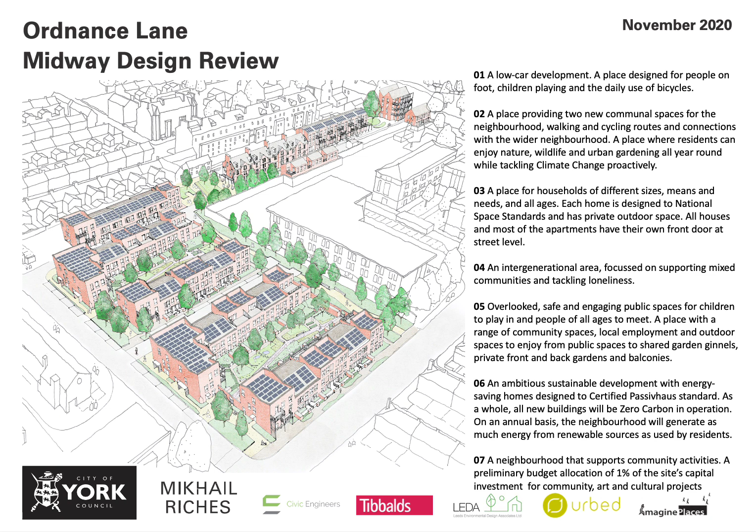The purpose of this presentation is to share our current design progress with you, following on from the workshops held earlier this year. We'd really like to hear your thoughts, so please share your comments in the online survey at the end.

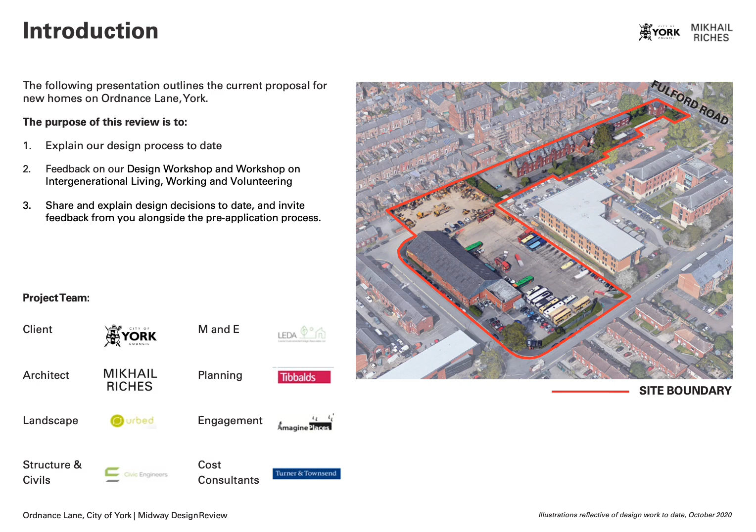This online exhibition follows a number of events held over the last 12 months. We've really enjoyed getting to know local residents and stakeholders at a variety of different workshops and online sessions, and have found your feedback so far extremely useful in shaping our design.

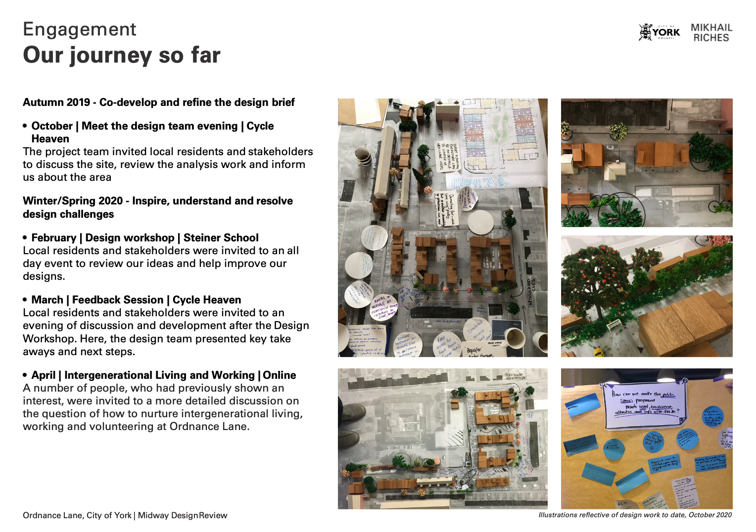At the end of last year, we met residents and stakeholders to discuss the site, review our initial work, and inform us about the area. Earlier this year, we held a day's design workshop, shortly followed by a feedback evening. More recently, a smaller group attended a specific intergenerational online gathering.

In February, we invited you to a full-day workshop held at the local Steiner School. Here, we discussed the scheme in its early stages, and some key development points came out, which the project team have taken away and worked on.

You asked us to review which buildings we were retaining on site. We spent time working through this, but in the end, it just wasn't feasible to retain more of the smaller existing buildings. So we're proposing to retain and refurbish the married quarters. I'll talk a bit more about this later.

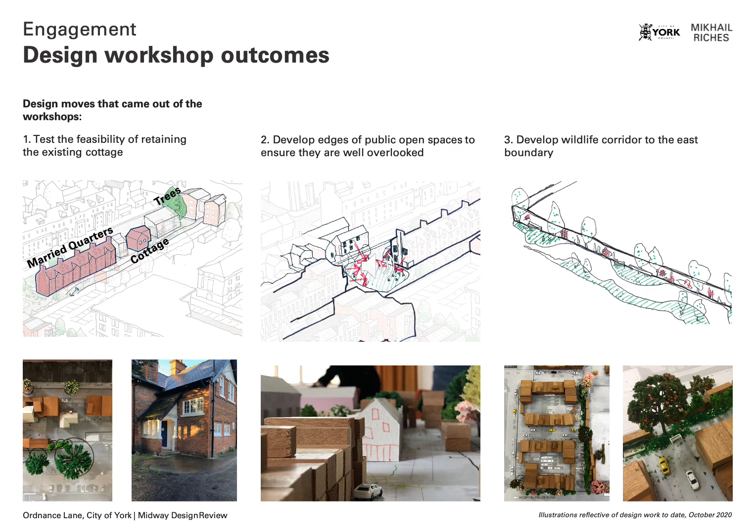You highlighted concerns about overlooking to make our public spaces safe, and together the idea for a wildlife corridor was developed to animate the eastern edge of the site and ensure this space is safe and well used.

Key to the proposal is providing intergenerational living opportunities. This aims to promote mixed communities who support each other, tackling loneliness and isolation.

As part of this online gathering, we explored the difference between intergenerational and multi-generational, and the importance of offering both on site. Intergenerational homes are individual dwellings occupied by mixed communities, so residents all have their own home but benefit from lots of community spaces, shared and private outside space, higher accessibility levels, and a design that's focused on supporting interaction and neighbourly relationships. Multi-generational homes are those that support two or more generations from the same family within one curtilage.

In April, we held an online gathering to focus on the local needs and aspirations for this part of the scheme. The key takeaways from this were to support people of mixed ages, accessibility requirements, interests and situations, to provide external spaces that are attractive and easy to maintain and encourage ownership. These communal spaces should be connected to the wider development and to key routes to encourage interaction.

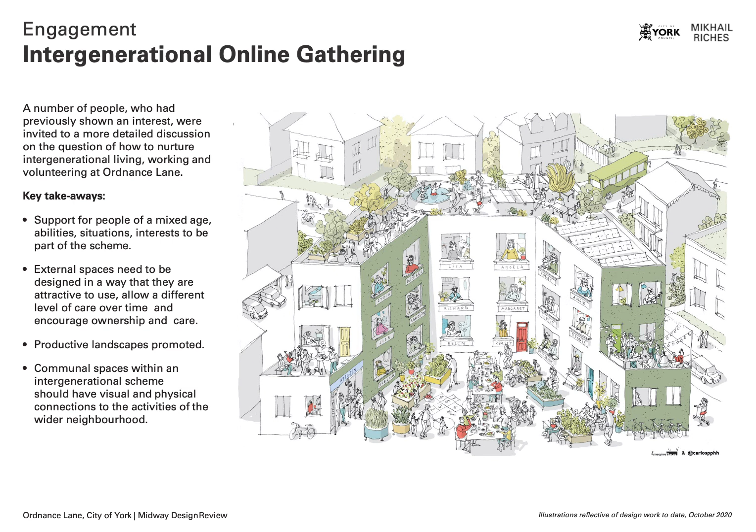I'm now going to briefly run you through our proposal, but first I'd like to bring it back to the core values of the brief, as set out in the CYC's Housing Delivery Programme Design Manual.

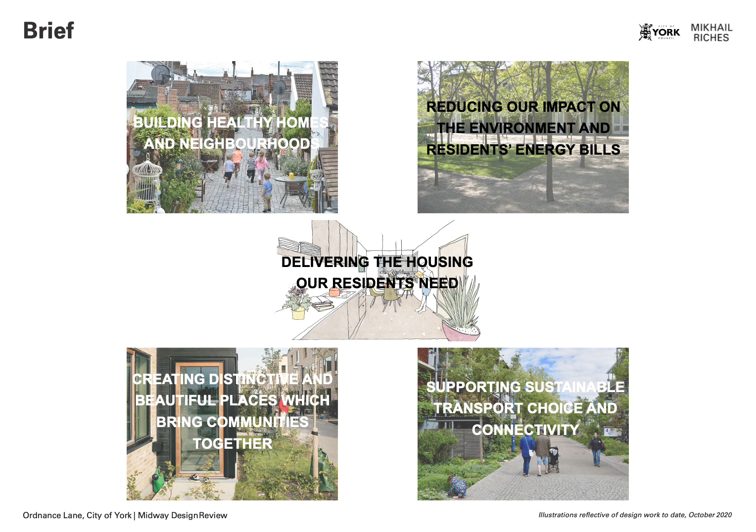These are to build healthy homes and neighbourhoods, reduce our impact on the environment and residents' energy bills, deliver the housing our residents need, creating distinctive and beautiful places which bring communities together, and to support sustainable transport choices and connectivity. The site presents some great opportunities and challenges that have shaped our proposal.

The orientation means that there is great potential for daylight and sunlight from the south, making it ideal for Passivhaus. The proximity to the National Cycle Network and to Fulford Road means that there are many sustainable transport choices available, and great public amenities within walking distance.

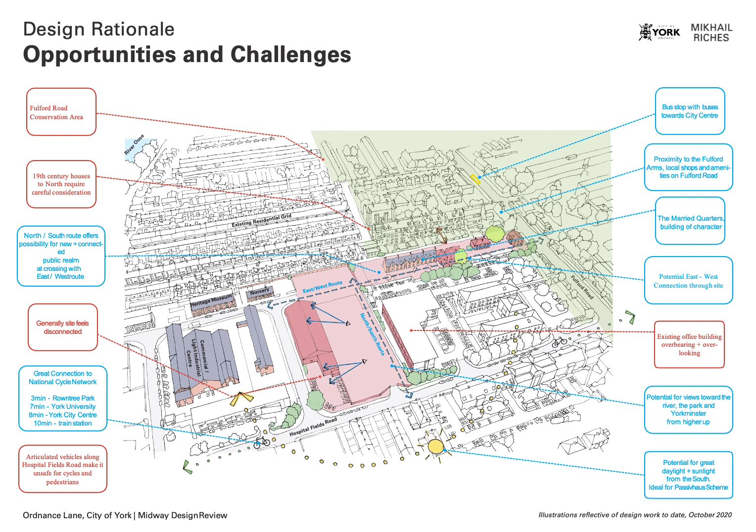We've also been careful to consider site challenges, such as the nearby 19th century terraces to the north, Fulford Road Conservation Area, and the existing office building that overlooks the site to the east. The site itself has a rich military history and partially falls within the conservation area.

These existing buildings on site have been looked at for their architectural merit and adaptability when designing the intergenerational homes in this area. The married quarters was chosen to be retained because it holds the most historic significance in relation to the military hospital and forms the heart of the scheme. It's also able to be reconfigured internally to provide new homes that our residents need.

More on this later. One of the things that came up in our design workshop was a question about retaining more of these buildings. We focused on the small cottage and tested whether it was feasible to keep it. Considering the intergenerational needs of this part of the site, keeping this cottage presented issues for the accessibility, as a lift would not be able to serve any new flats.

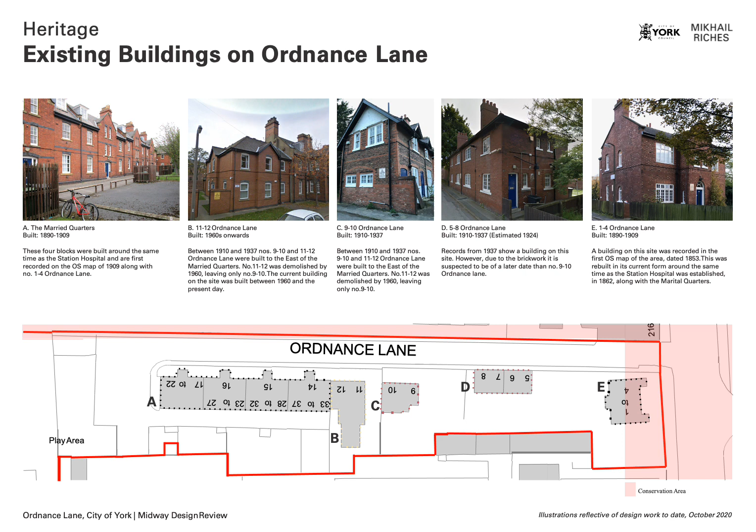Positioning new homes around the cottage, the existing married quarters, and two existing trees on site was not possible, as the cottage itself would be compromised by new homes being uncomfortably close around it. This resulted in poorly functioning landscape and access, and lower design quality overall. So, on balance, the project team felt the benefits of providing a new intergenerational scheme outweighed the benefits of keeping this cottage.

I'm now going to talk through the rationale behind the proposal you're going to see today. Firstly, the married quarters building is retained, while other buildings on the site are cleared.

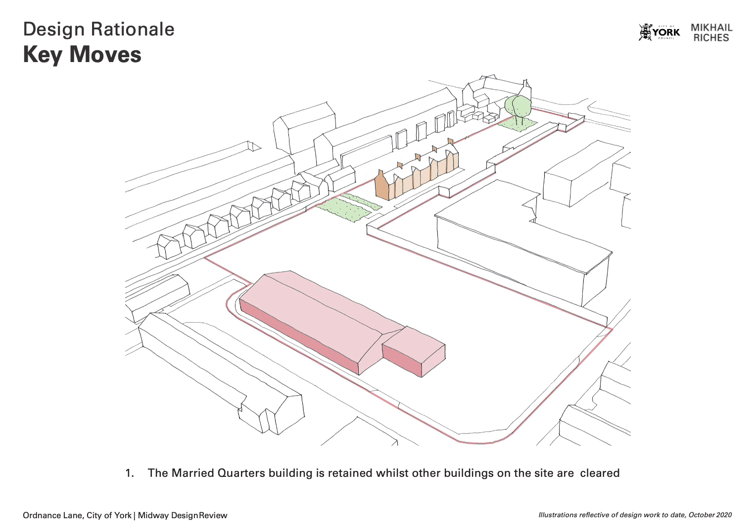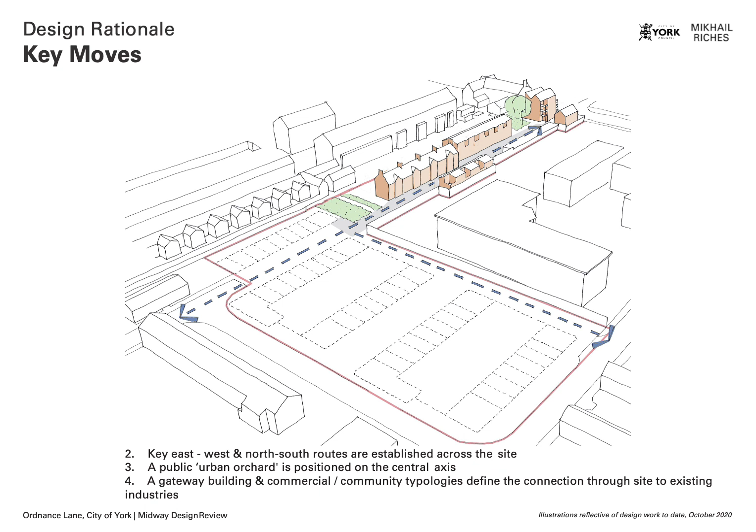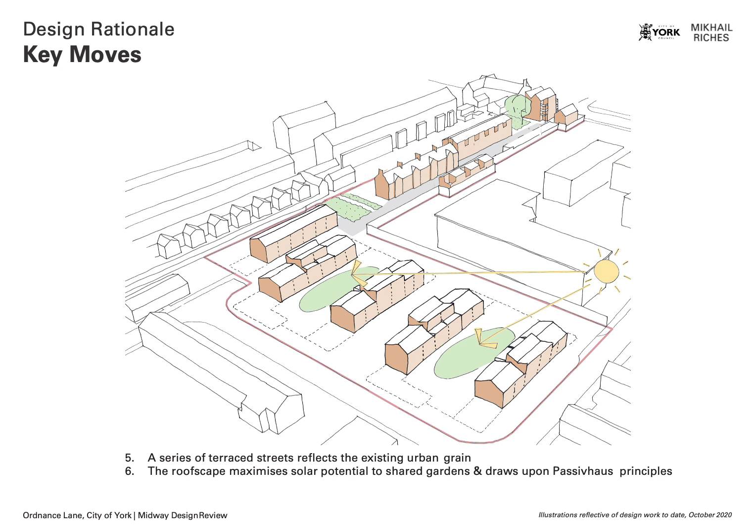Key east-west and north-south routes are established across the site. A public urban orchard is positioned on the central axis between these two, next to the married quarters, and a gateway building and commercial or community typologies define the connection through the site to the existing industries. A series of terraced streets reflects the existing urban grain, and the roofscape maximizes solar potential to shared gardens and draws upon Passivhaus principles.

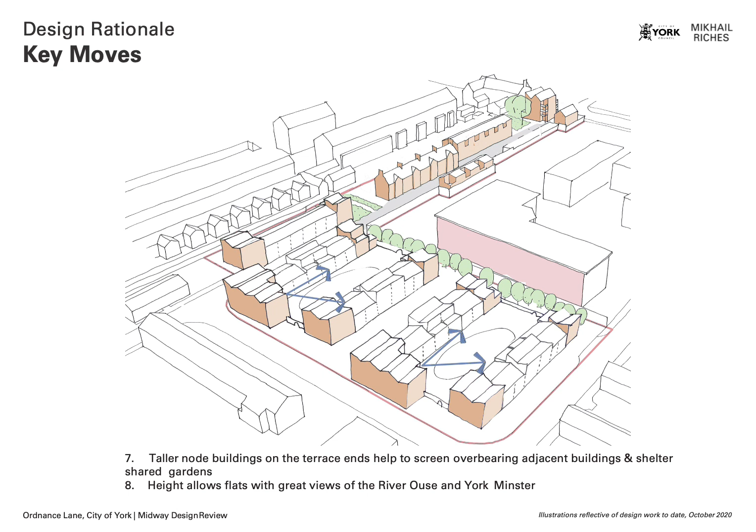Taller node buildings on the terrace ends help screen the overbearing adjacent buildings and shelter the shared courtyard gardens. This extra height also allows these flats to have great views of the river and York Minster.

All homes are designed to Passivhaus standards. This means the homes are all airtight, have high insulation levels, and use solar gains to reduce energy demands. In summer, solar shading is used to avoid overheating, and mechanical ventilation and heat recovery is used throughout. All junctions in the construction are thermally modelled, so there are no thermal bridges in the construction of these homes. These moves are key to reducing residents' energy bills and achieving our target of net zero operational carbon.

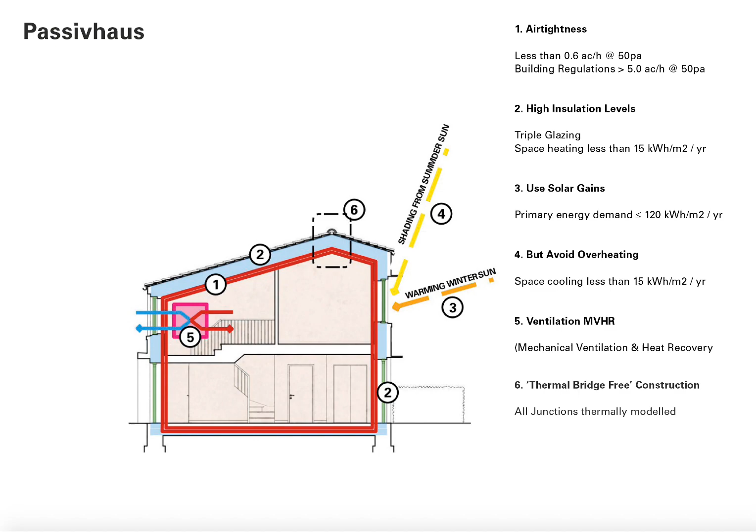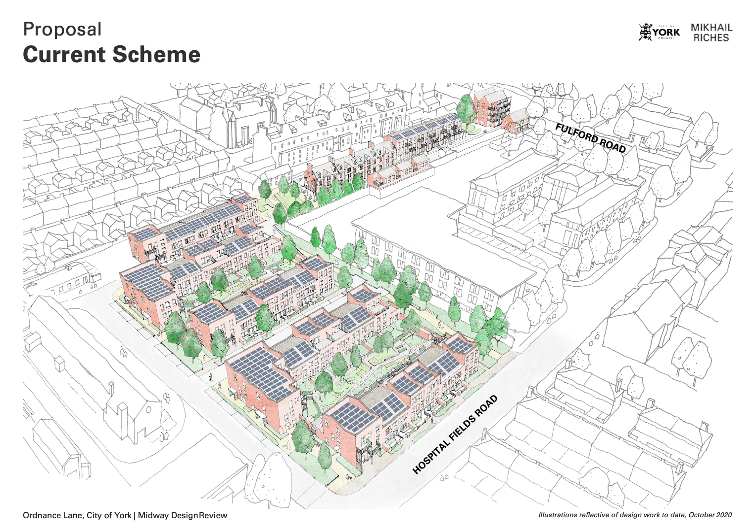There are two key public squares that sit along this route. The urban orchard is at the end of the married quarters, and the intergenerational pocket park is to the east, closer to Fulford Road. Zooming in first on the intergenerational part of the site...

On the left you can see the urban orchard, then the refurbished married quarters, and small live-work units opposite, and to its right a stretch of new homes that end at a pocket park. Beyond this is a larger 4-storey building that forms a gateway to the site off Fulford Road.

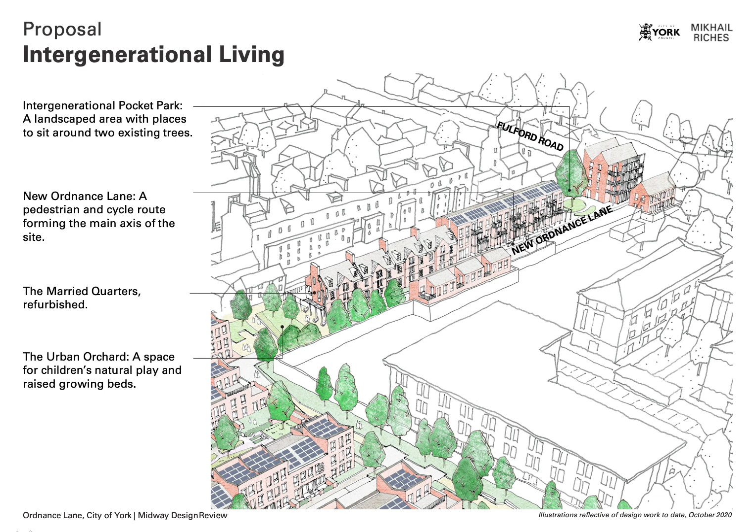This street is a vibrant pedestrian and cycle route to encourage play and connectivity. The western side of the site is characterised by 2 to 3-storey terraced streets, arranged around generous shared courtyard gardens. Front gardens also include secure bike storage, and these streets also provide on-site parking for larger or wheelchair-accessible homes.

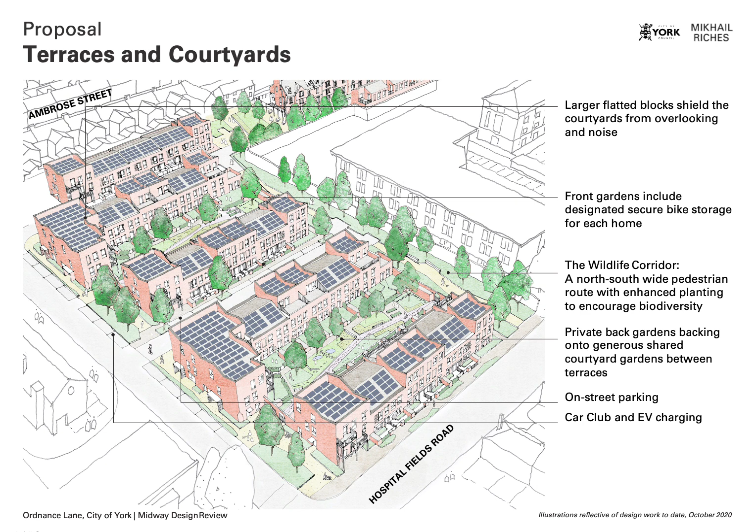Along the far side of these terraces, you can see the Wildlife Corridor, a pedestrian route that runs north-south up to the urban orchard and New Ordnance Lane.

The scheme provides 89 new homes, with 28 on-site car parking spaces and 14 along Hospital Fields Road next to the industrial estate to the west. 10 of these spaces towards the top of the plan are blue badge spaces, accessed via the public highway at the back of Wenlock Terrace and serving the intergenerational community.

To the west of the site is an electric vehicle charging point with designated electric vehicle parking and a car club space. The scheme is low car, so has a focus on providing safe streets for pedestrians and cycles. This is encouraged by providing lots of secure cycle shelters within each home's curtilage, cargo bikes, and a car club proposal.

Access to cars is controlled, with general vehicles only being allowed to drive between the terraces, highlighted here in blue. The north-south route and east-west route towards Fulford Road are living streets, which are pedestrian and cycle routes with a focus on play, community and landscape.

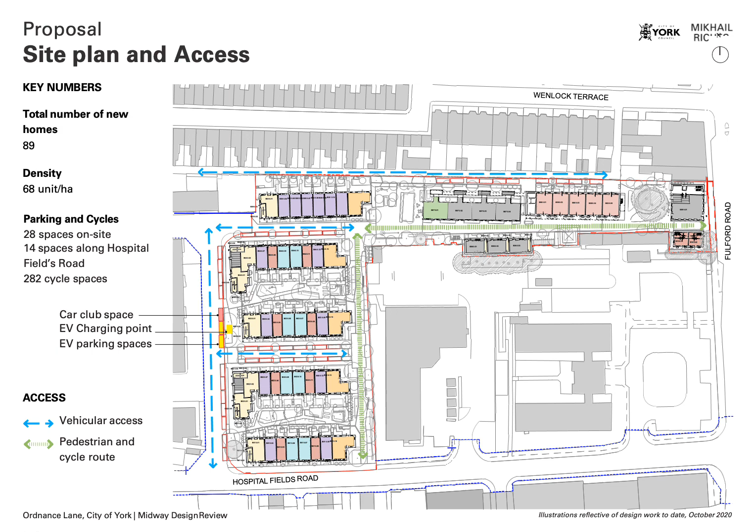Landscape is really key to the scheme, and each of the landscape spaces has been designed to have a unique character, so there is a variety of external amenities on offer. These range from private front and back gardens to secure shared courtyard gardens with wild play opportunities, to public squares with communal growing opportunities and fruit trees.

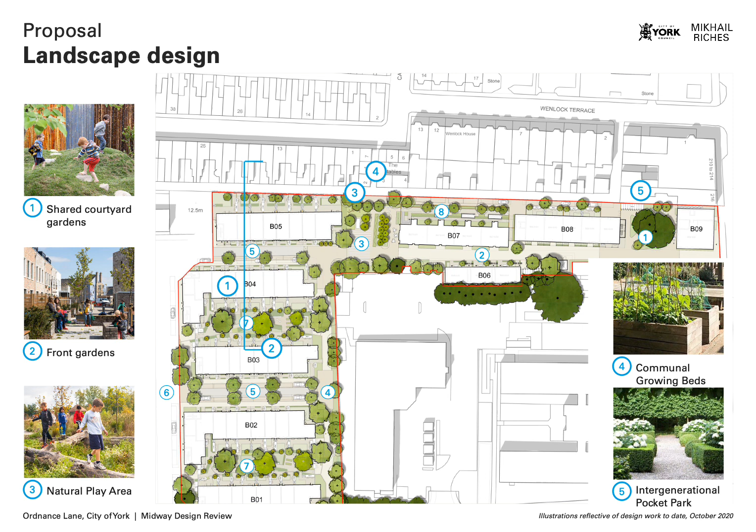I'm now going to walk you through a few key areas of the scheme. First of all, the intergenerational living towards the east, adjoining Fulford Road.

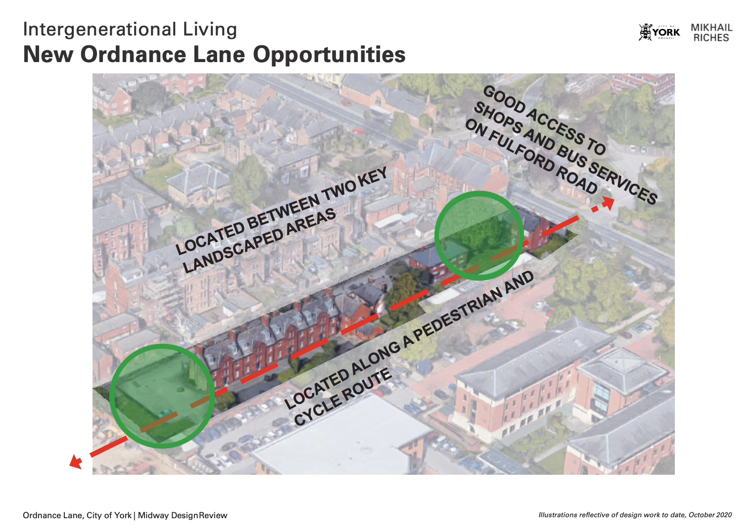In order to support a mixed community with a variety of needs, it's really important that the intergenerational part of the site is well connected. Providing it along New Ordnance Lane means there's really good access to shops and bus services on Fulford Road, but it's also located between two key landscaped areas to provide external amenity on site. The route itself is along a pedestrian and cycle route, so it's protected and a safe place to be outside on the street.

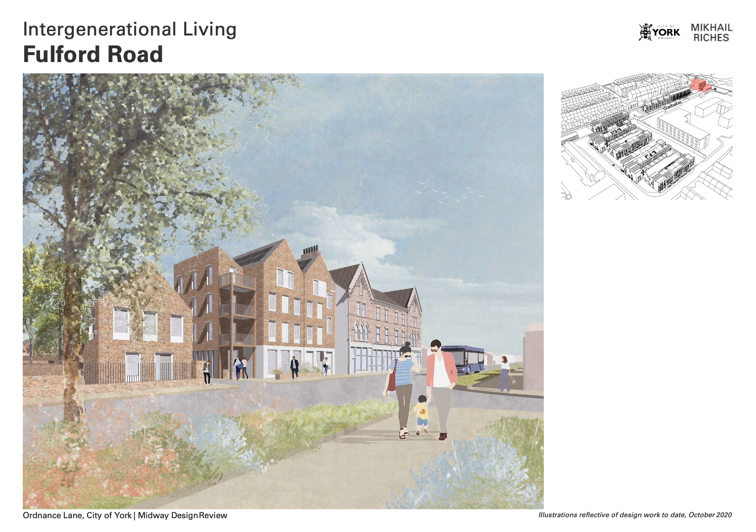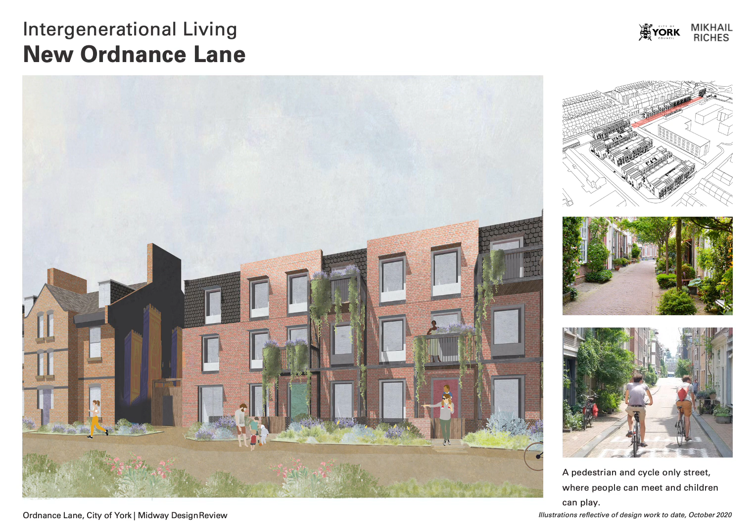Mass and materiality. Moving west, this illustration shows the refurbished married quarters on the left and the new 3-storey building to its right. This is New Ordnance Lane, the car-free street that promotes social interaction in this intergenerational community. The existing married quarters will be refurbished to serve the intergenerational community.

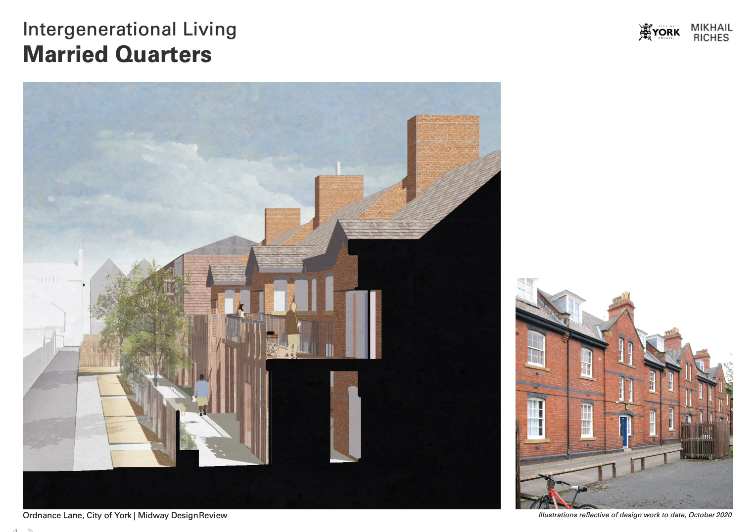To increase the accessibility of these homes, a new lightweight walkway is being introduced at the rear. Behind this is a shared garden for residents with raised growing beds that benefits from its linear shape. Behind this, within the site boundary, are 10 blue badge parking spaces for the wheelchair accessible homes across the intergenerational part of the site. These are accessed off the public highway to the rear of the married quarters.

This is a drawing of New Ordnance Lane and the intergenerational part of the site. These blocks provide a mix of 1 and 2 bed flats that cater for a mixed group of residents. They've been designed to offer flexibility so that the area will support people of different ages, accessibility needs, situations and interests. Community spaces sit at the ends of the buildings, so they're well used and also help to animate the public squares.

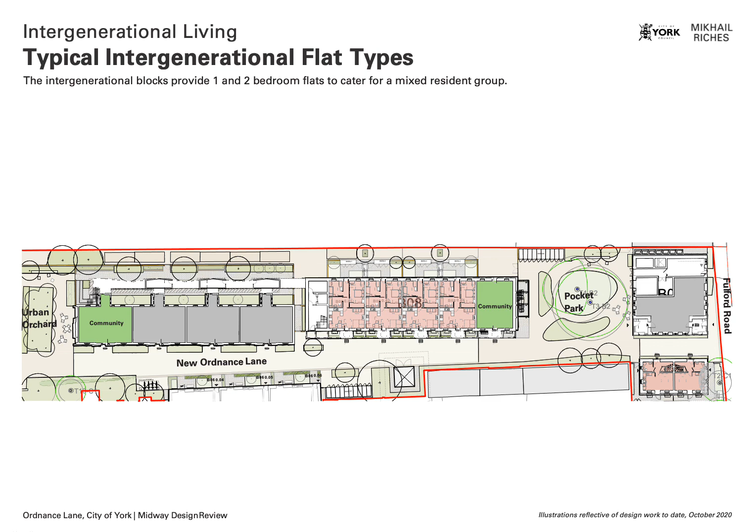If we are able to do so, commercial and live-work units will also be located along this street to animate the public realm. These are shown in grey here.

The next key area I'm going to focus on is the urban orchard. This is between the terraced streets and the married quarters, and there's a generous public square at the intersection between the north-south and east-west axes of the site.

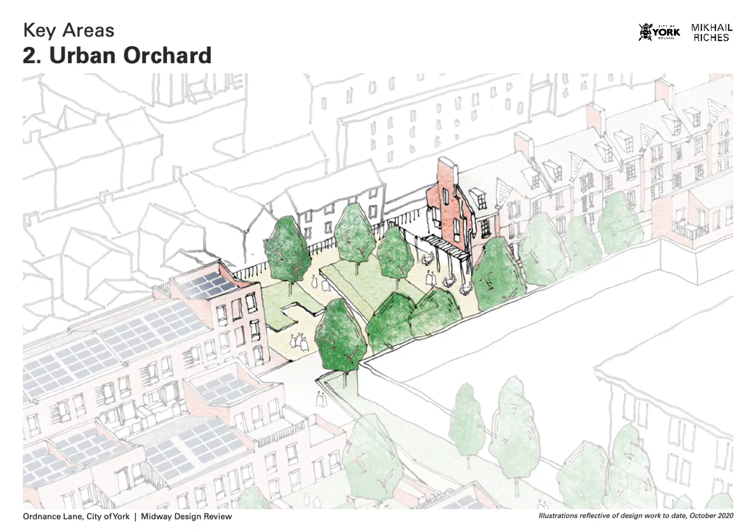Here there are fruit trees, seating areas and raised planting beds that the whole community can enjoy. The married quarters community space opens out onto this square with outside seating. The square is also well overlooked by windows off bedrooms and living rooms from the flats above.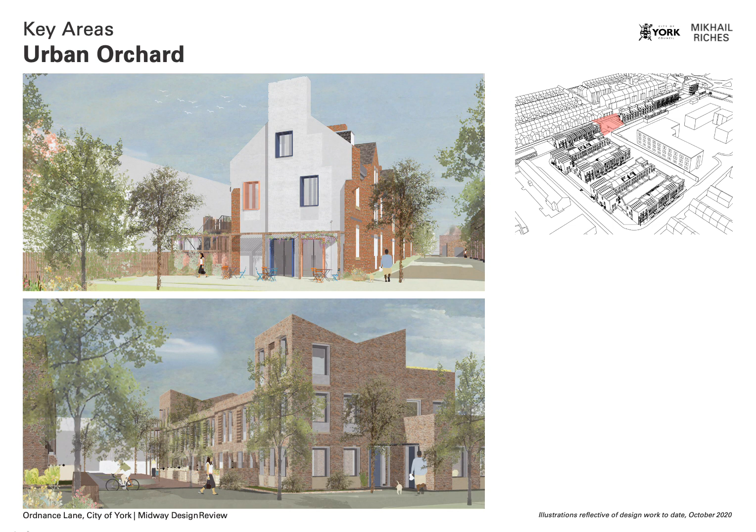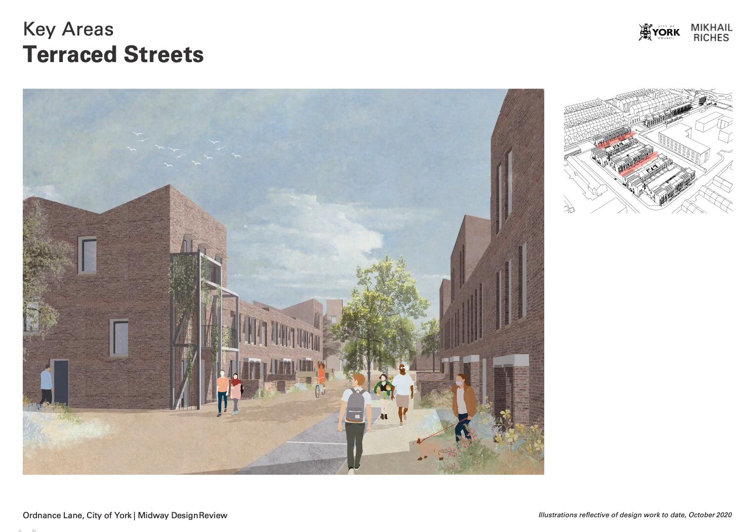Continuing west from the urban orchard are the terraced streets arranged around courtyard gardens. This image shows a typical terraced street. These terraces provide a mix of 2, 3 and 4 bed homes, with the larger end of terrace flatted blocks providing 1 and 2 bed flats over 3 stories.

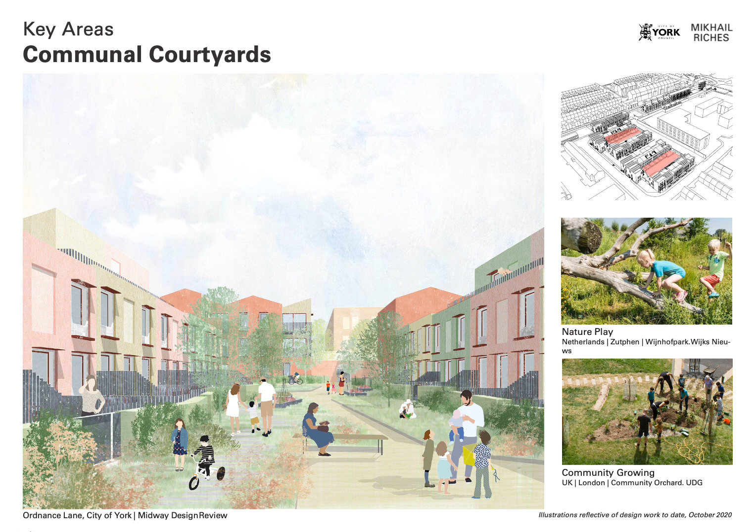At the back, these terraces back onto shared courtyard gardens, which offer safe spaces for children to play, raised growing beds and shared seating. Along the eastern edge of the terraces is a generous pedestrian route running north-south towards the urban orchard. This landscaped route also helps to protect and screen from the larger office building next door. Bats, bees and native species of plants are encouraged here.

The bottom image also shows the multi-generational house type that I mentioned earlier. These are larger 3-storey homes that overlook the wildlife corridor at the end of each terrace, making it a safe space for children and pedestrians.

These homes are designed for 2 generations of the same family to live within the same dwelling. They take the form of a ground floor wheelchair accessible flat with an adjoining 4-bedroom house. The 2 parts of the house are connected internally and are within the same building envelope, but they have their own front doors to offer a level of independence for each generation. Both have access to a private garden at the back, which again opens up onto the shared courtyard beyond.

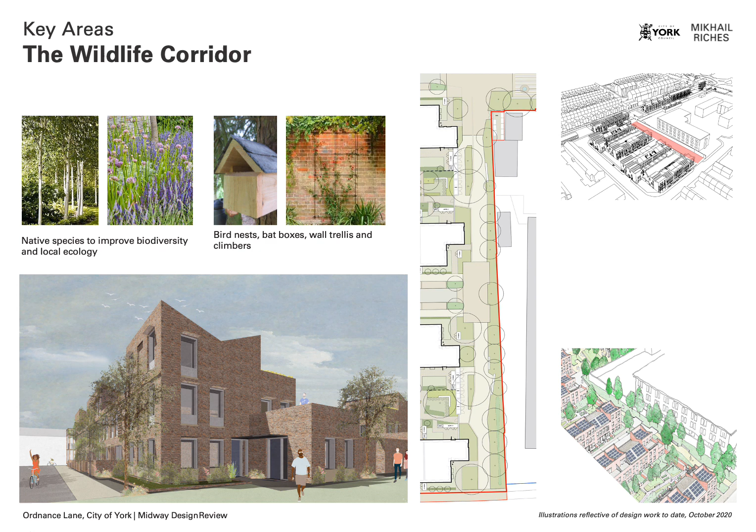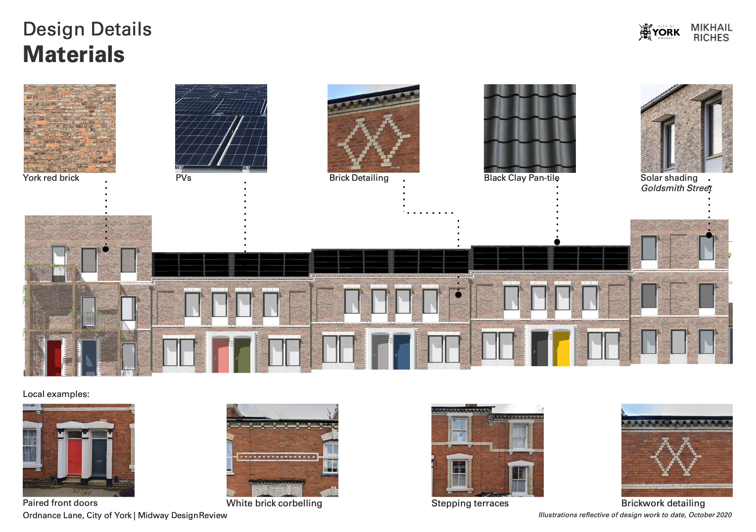Focusing on the design of these streets, local precedents have been used to guide our material choices. York red brick has been used for the main facades, but key details have been picked up from the surrounding areas, such as paired front doors, white brick corbelling and stepping terrace details, and these have all inspired our design.